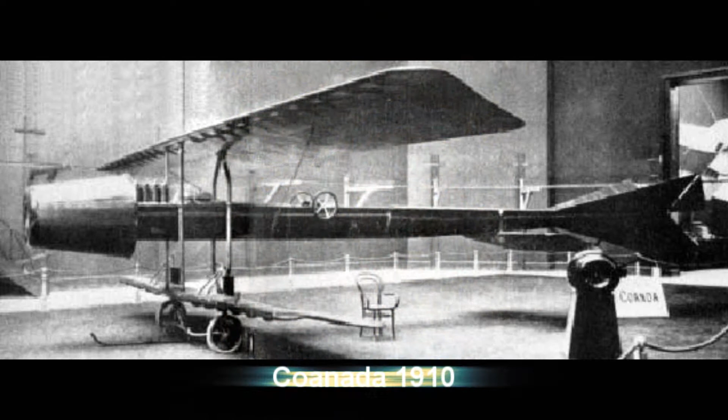The truth was that the jet engine was too inefficient at slow speeds to be pursued any farther until the early 20th century. There were a few notable finds in the early 1900s. Secondo Campini built the first thermal jet. Henri Coanda built the first ever jet-propelled aircraft, the Coanada 1910. In 1913, René Lorin built the subsonic pulse jet, a form of the jet engine.

In the early 20th century and World War II, piston engines powered most planes. Engineers were starting to realize that the piston engines had their limitations, and the jet engine was getting a more serious second look. The first major step toward a jet engine was not on a plane at all. In 1915, Albert Fono in Hungary invented a way to increase the range of artillery.

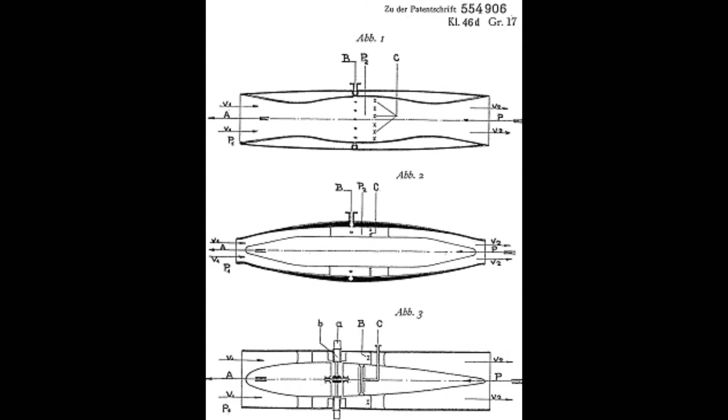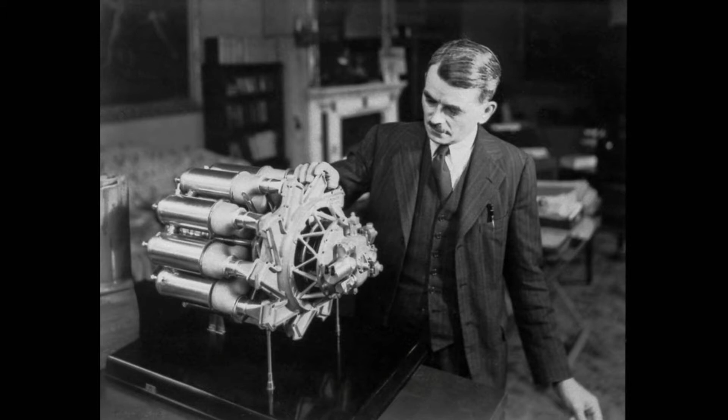There were steps towards a jet engine, but nothing very promising, until two men separated and unaware of each other made a huge accomplishment. In 1928, Frank Whittle was just an RAF College Cranwell cadet in the United Kingdom, but in 1930, Whittle submitted a patent for his invention, a turbojet. The patent was approved in 1932, and in 1937, Frank Whittle had his first jet engine built and running.

But due to a lack of financial backing, Whittle's project was stopped dead in its tracks. But unknown to Whittle, another man was working on a very similar project. In 1935, Hans von Ohain in Germany started work on an engine similar in design to Whittle's, and Ohain was set up with Ernst Heinkel, owner of the Heinkel Engine Company. In September of 1937, the duo had their first engine running, the HES-1.

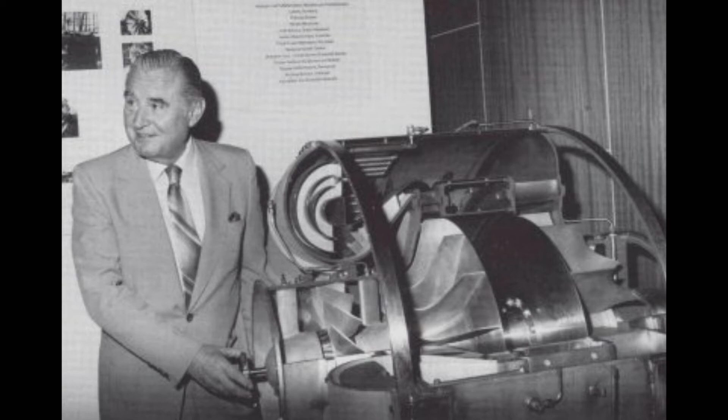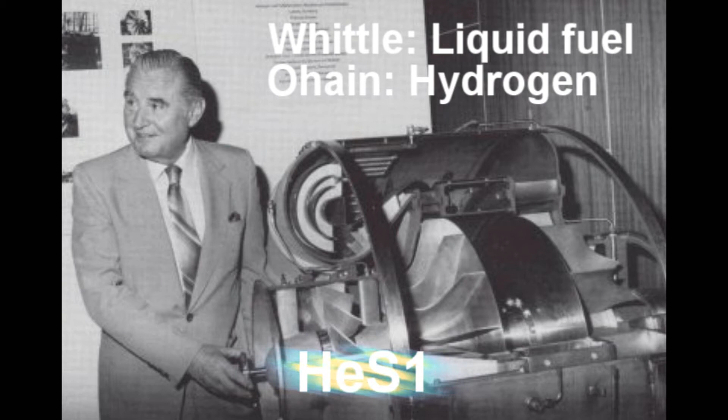The main difference in the design of Whittle's jet and Ohain's was that Frank Whittle's ran on liquid fuel, while Ohain's worked on hydrogen. Ohain's final model of the engine, the HES-3, was put into the Heinkel HE-178, the first plane ever to fly purely on turbojet power. It was flown by Erich Warsitz on August 27, 1939.

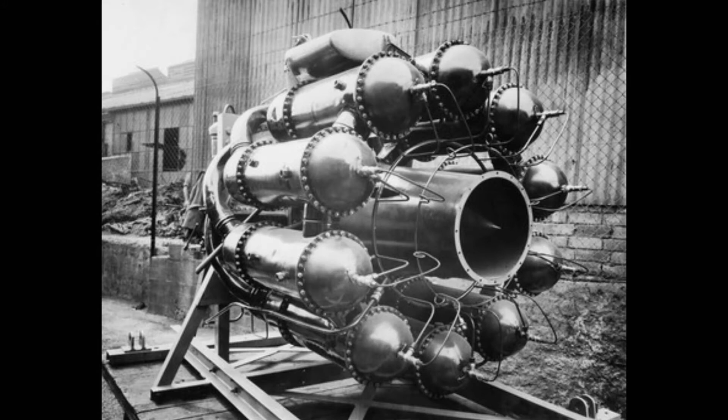Meanwhile, in the United Kingdom, Whittle's Power Jets Limited started to receive Air Ministry money, and much later they had the W1 engine built and finished in 1941. It was fitted to the Gloster E.28/39, and on May 15, 1941, the Gloster E.28/39 became the first British plane to fly solely on turbojet power. Today, we recognize Frank Whittle and Hans von Ohain as co-founders of the jet engine.

Although there were jet engines available, many aircraft companies decided to stay with piston engines in the 1940s. In 1944, the German Nazis were losing the war and they needed new technology. The Messerschmitt Me-262 was the first fighter jet propelled by jet engines, and it had a huge edge on slower and less maneuverable piston engine planes. The Arado AR-234 was the first bomber propelled on jet engines, introduced into the German Luftwaffe in September of 1944. It was the last Luftwaffe plane to fly over England, in April of 1945.

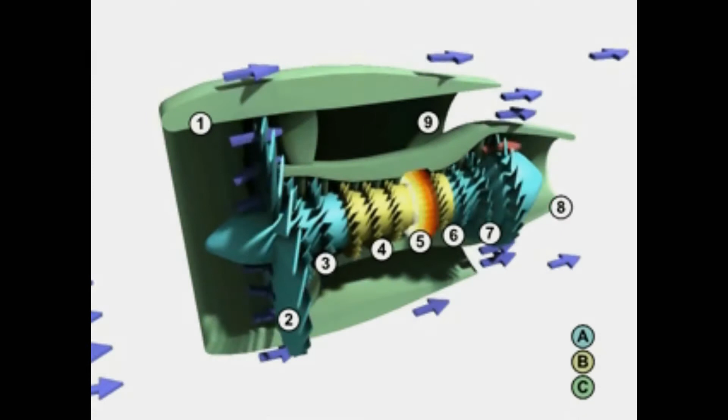In the 1950s, advancements in jet engines improved in large steps. Almost all planes in the 1950s were powered by jet engines. By the 1960s, large civilian aircraft were also powered by jet engines. Finally, in the 1970s, the high bypass jet engine was invented, increasing efficiency beyond that of the piston engine. The flying world had been powered by jet engines for half a century.

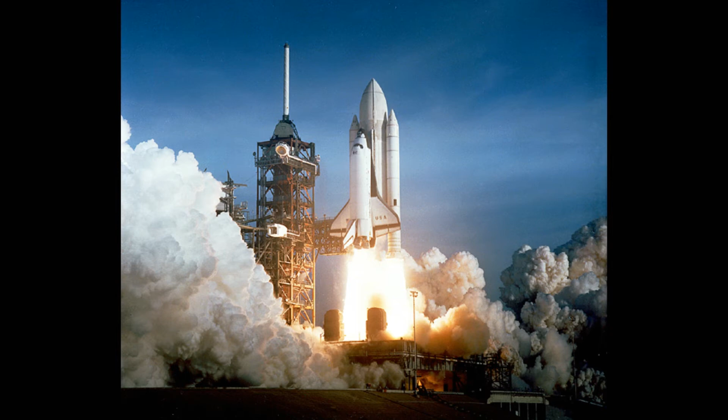Today, more advanced forms of the jet engine are being tested and introduced, such as the scramjet. In the future, the possibilities of jet propulsion are endless, as already jets have taken humans to the moon and taken probes to the far reaches of our solar system. Scientists and inventors are working on many new models of propulsion right now.

This is the jet engine. The jet engine can be split into four main components: the compressor, the combustor, the turbines, and the exhaust.

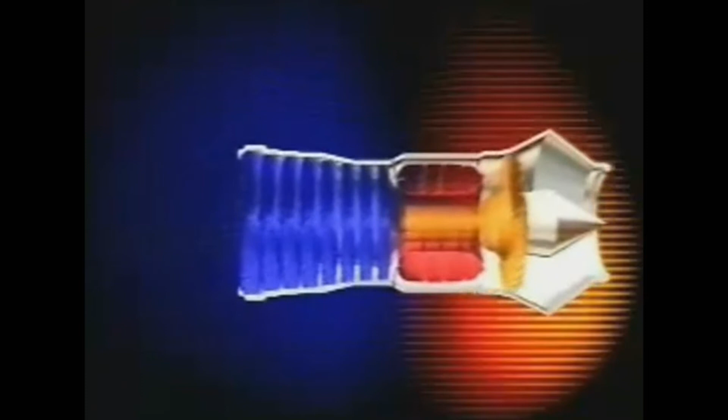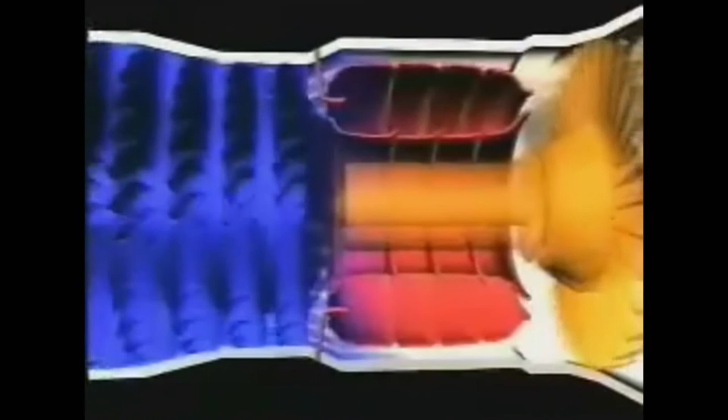The compressor draws air from outside. It compresses the air down and funnels it into the combustion chamber, at which point the air is under tremendous pressures, about 600 psi. In the combustor, when fuel is added, heat energy increases dramatically to about 2,100 degrees centigrade, and tremendous energies are produced, like a miniature explosion.

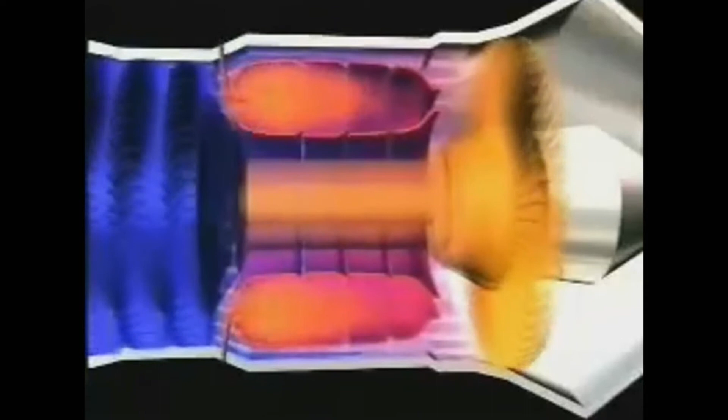This energy is pushed through the turbines, which are almost like reverse compressors and often power propellers and other equipment in the engine. But at this temperature, the metal composing the turbine would melt, so cooler air must be continually pumped into the combustion chamber, lowering this heat energy to around 1000 degrees centigrade.

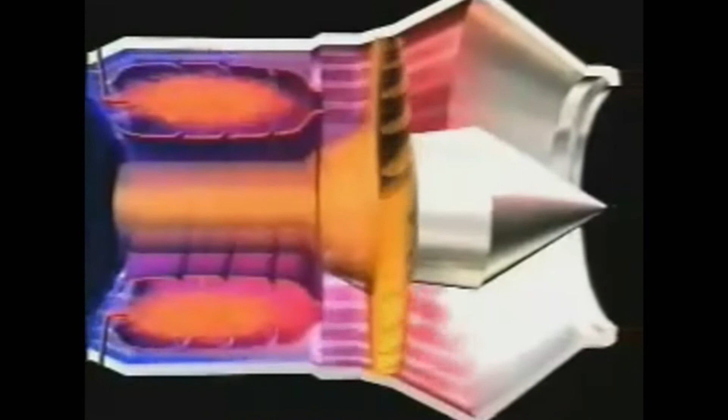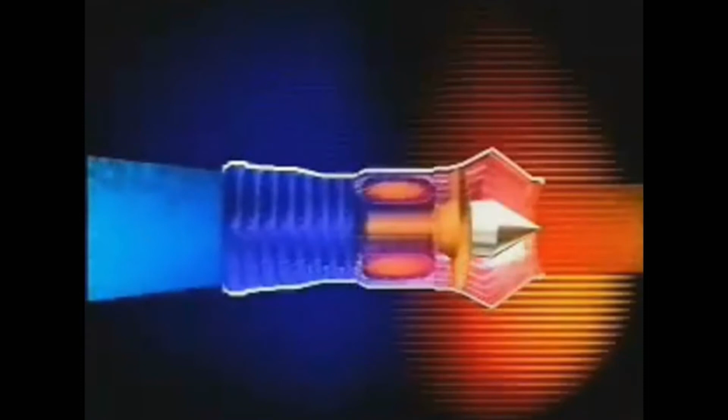Some of the air is used to power the turbines and compressor, while the majority is expanded in the turbines and thrust out of the engine in the exhaust. By Newton's third law, every action has an equal and opposite reaction: the air is taken in at normal speeds and shot out at far greater velocities, so the airplane moves forward. This is the principle at work in almost every working jet engine to this day.

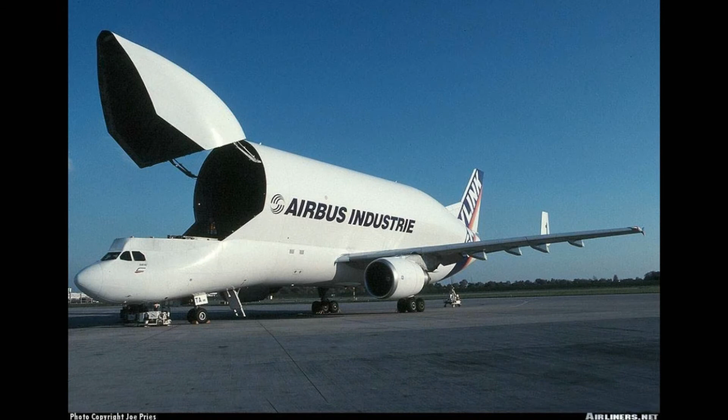Jet engines have made improvements upon themselves, and also improvements on commercial applications such as airliners, cargo planes, and shipment jets. Airlines such as Delta, American, Southwest, and Continental all depend on large companies for their jet engines. Over the years, jet engines have become more lightweight and efficient, and have adapted well to commercial airliners that carry passengers across the world in short amounts of time.

Companies that build jets include Pratt & Whitney, Lockheed Martin, and Boeing. Also, in my own home state of Texas, this includes Bell Helicopter. These companies use millions of dollars to create high-quality, state-of-the-art engines, which can then be used to mount on planes that carry cargo, passengers, or mail across the world.

Federal Express, also known as FedEx, is an example of commercial adaptation of jets for use with mail and package shipment. As commercial uses become far more frequent, changes in the aviation industry happen quickly, making jet engines more versatile, including improvements in safety and efficiency.

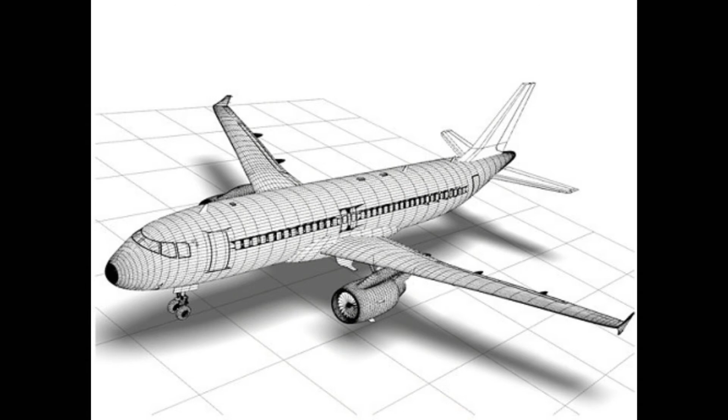Jet engines have made a huge impact on the military and armed forces. Before the invention of the jet engine, it could take days or even weeks to move troops or supplies from one location to another. Now, thanks to the jet engine, moving large amounts of troops is much quicker and a lot easier. Jets have also greatly impacted our air support.

From recon planes to stealth bombers, it all leads back to the jet engine. Air vehicles are now much faster and a lot more efficient, cutting the prices of air support. Some bombers and planes can go up to heights of 85,000 feet, that's 16 miles high. The invention of the SR-71 Blackbird was a huge jump in technology, and it would be

nothing without the jet engine. The jet powered the plane up to speeds of 2,193 miles per hour, shattering all past speed records by a long shot. Because of the jet engine, the power and speed of our military has skyrocketed, no pun intended, and has brought us to a new era.

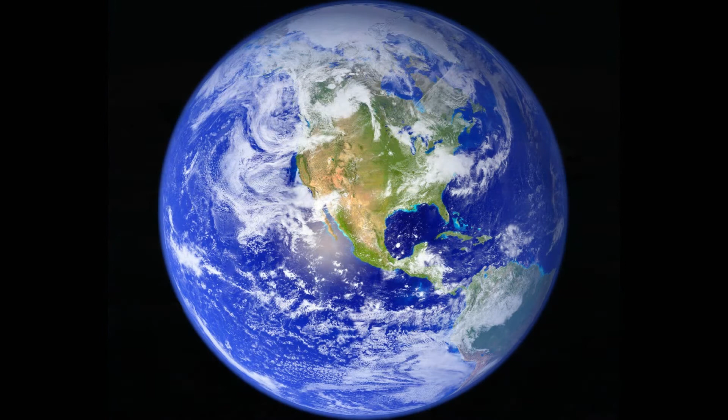Because of the speed and efficiency of jet engines, they provide fast and easy transportation worldwide for billions of people. The innovation of these machines has affected the world in many ways, including the spread of popular culture, the globalization of goods and services, and even migration. So it goes to show you that the jet engine has drastically changed the lives of many people, most of which aren't even aware of that.

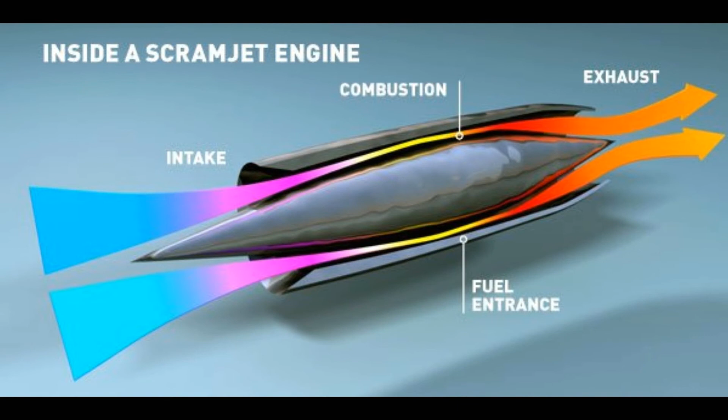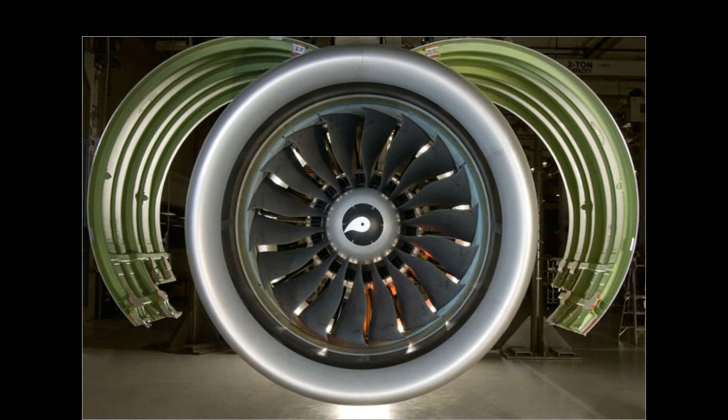The future holds much for jet engines. Recently, scientists have been testing biofuels for use with these engines to try and make them environmentally friendly. Scientists are also designing jet engines made of plastic materials and polymers. These plastics and polymers have yet to be discovered and must be as light as a feather, yet as strong as a board. Aircraft designers do many tests to find the right materials that can withstand extreme heat and humidity on the ground, yet minutes later deal with the cold, dry conditions in the air.

A very recent development has been made by Bell Helicopter in the invention of the V-22 Osprey, a helicopter whose rotors can rotate, each powered by a jet turbine engine. Jet engines have truly revolutionized the world in more ways than we can convey in this presentation. The innovation of the jet engine has had a far-reaching impact throughout the world. Next time you're in an aircraft, we hope that you understand and admire the effort people have expended into enabling you to soar amongst the clouds.